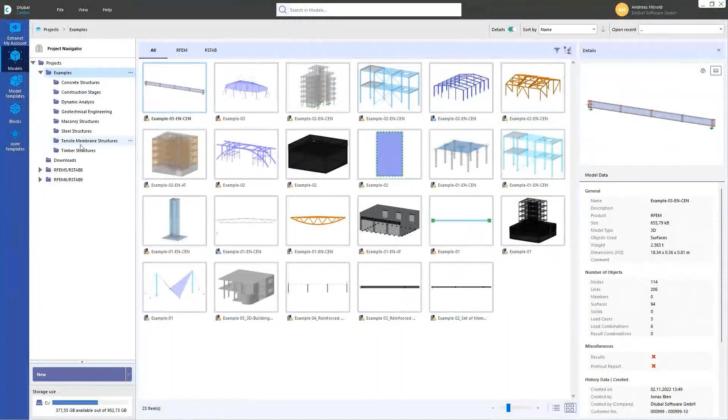You can find this example in the Dlubal Center under examples, then steel structures. I prepared this and also selected the steel design. Let's do a steel design.

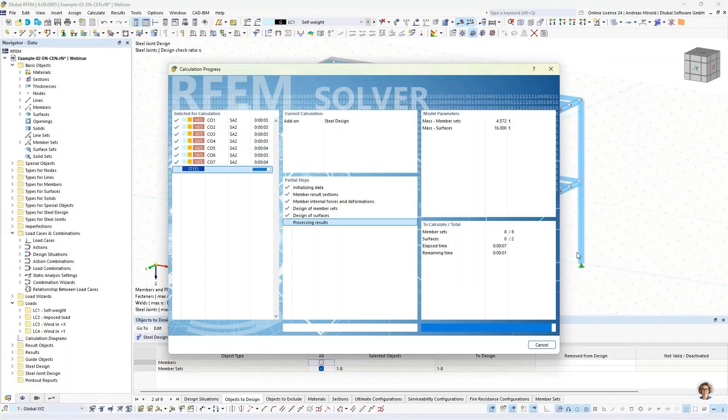I select only the member sets, which are all the columns. Let's calculate all. I have to mention I don't edit imperfections or buckling lengths and so on, so we don't do any stability design here. It's only an example.

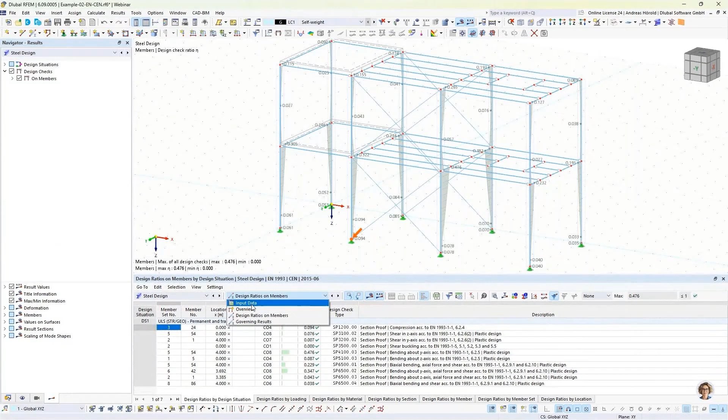So I switch to the wireframe model, and you can see we see all the results for the member sets. When we want to design the members too, I select the members, and then all results are deleted.

Now I'll show you the other way. I calculate the member sets again. If you don't want to delete the existing results, go to the navigator data on the left at the bottom, then right-click on steel design and press settings.

The other way is to go to the table steel design, input data, and press that button. That's a different way. Then you can deselect the option to delete all add-on results when changing input data, and if you uncheck that, the results aren't deleted.

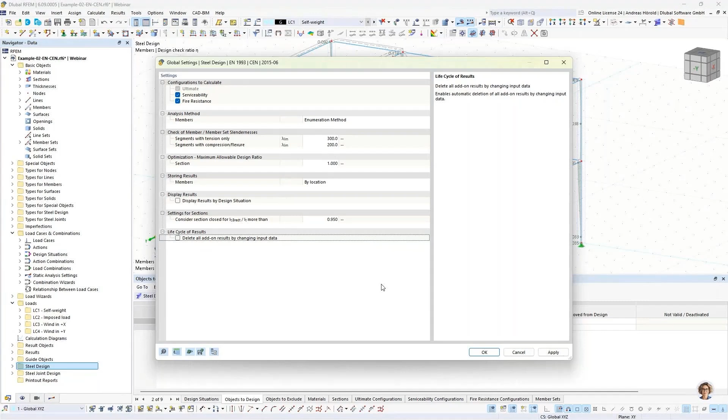So now we select the members too. The results aren't deleted, and I can recalculate all. Now we have results for all.

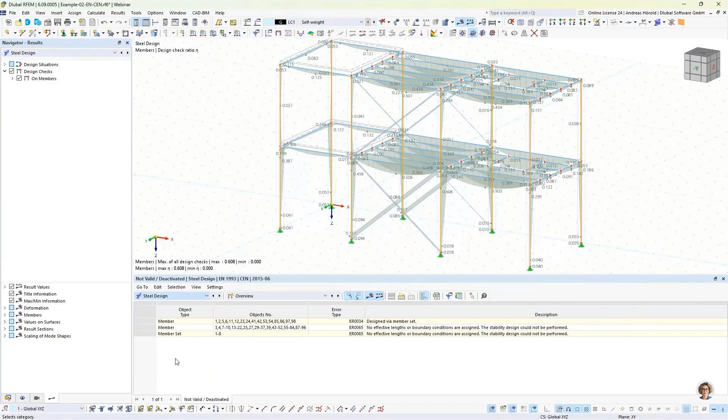It shouldn't be necessary for this simple calculation, but if you have more complex models or more load combinations, for example, and have activated the add-on steel design, this can be useful.

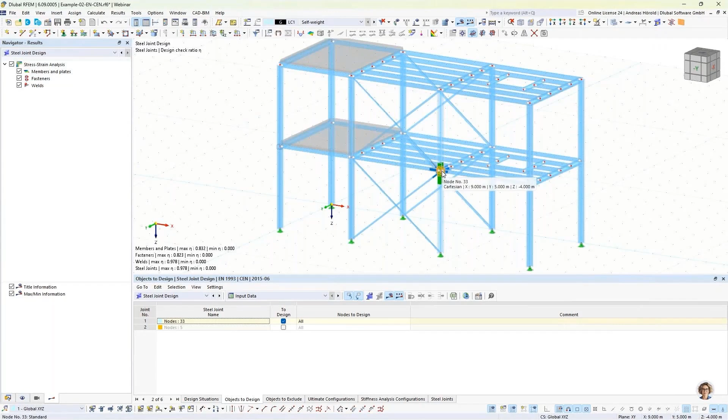In this example, only one of two nodes is designed, only this one. I can show that. This connection, or joint, is already calculated, but not this one.

If I deselect that too, then I can press the button for designing node 5, and the results aren't deleted. It's only an error, not yet calculated, but the results of node 33 aren't deleted.

Okay, then we turn to the next question. I want to edit a multi-print afterwards, how do I do that? I prepared an example for this.

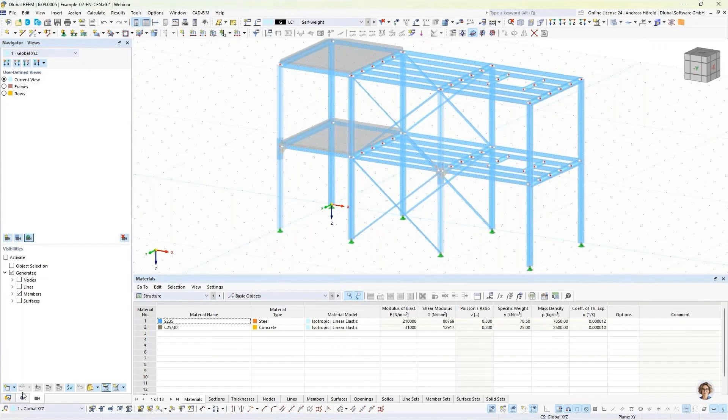First, I don't show the results. As I said, I prepared user-defined views for the frames and rows, and I want to print the internal forces, for example for the rows or the frames. Let me show that — for example, we show the member internal forces for N.

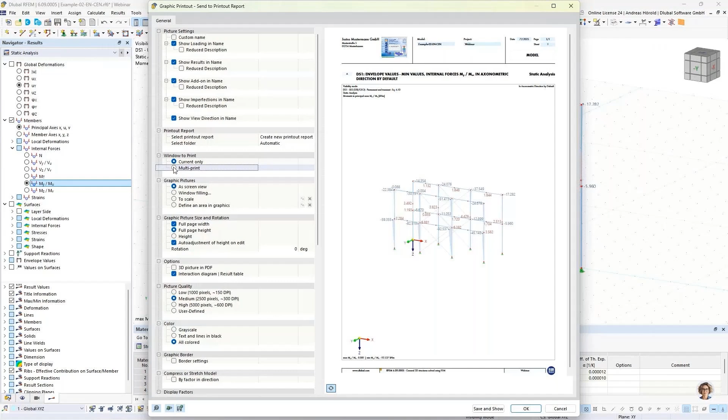We would like to do a multi-print, so let's do that. Print graphics to printout report, then I select multi-print and window filling.

Then we have to select what we want in the multi-print — no views, no loads, but results, for the frames and rows using the user-defined views, then members' internal forces, for example N, VZ, and MY.

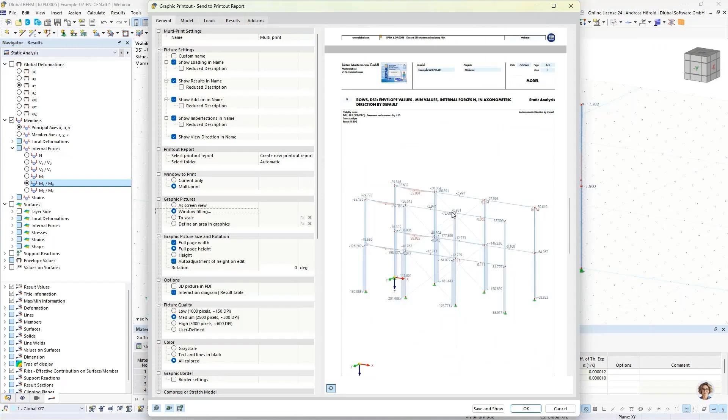I don't print the steel design results and the steel joint design results. Okay.

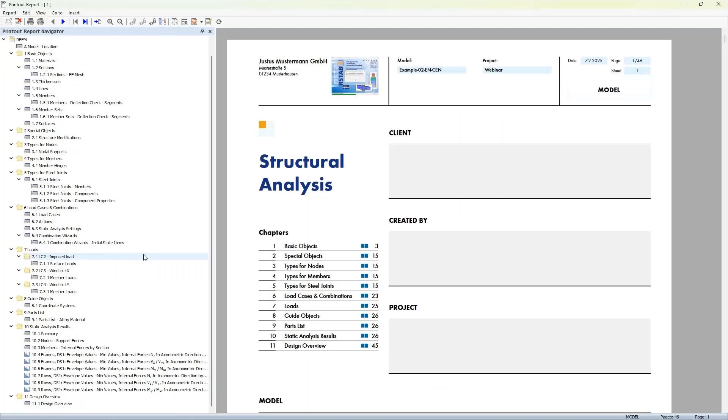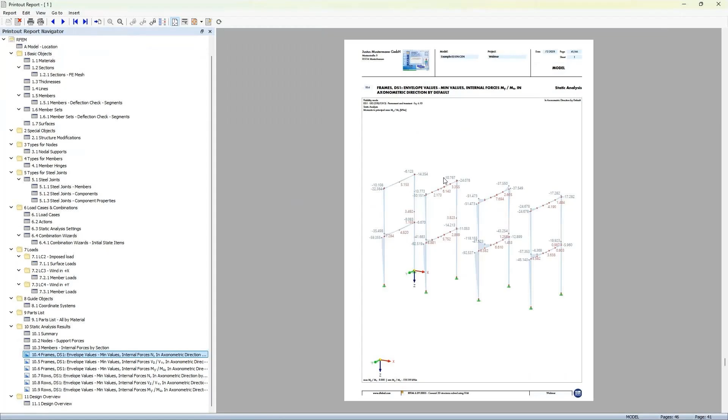So now we can see the different graphics. I can change the view, fit page. So those are the 6 graphics, and we want to edit these multi-print.

So how to do that? That button, edit multi-print, I select it. Okay.

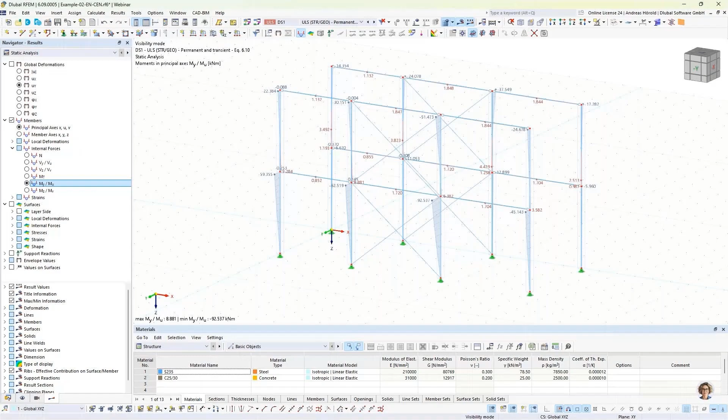So now we can change the settings. For example, results, we want to add the other internal forces. So now we have got 12 images.

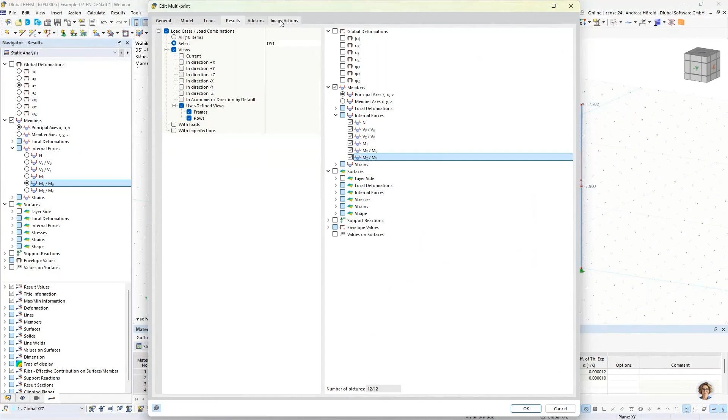And we can go to or turn to image actions. And we can increase the window. We can say update or no action, add for the new graphics, or what you want.

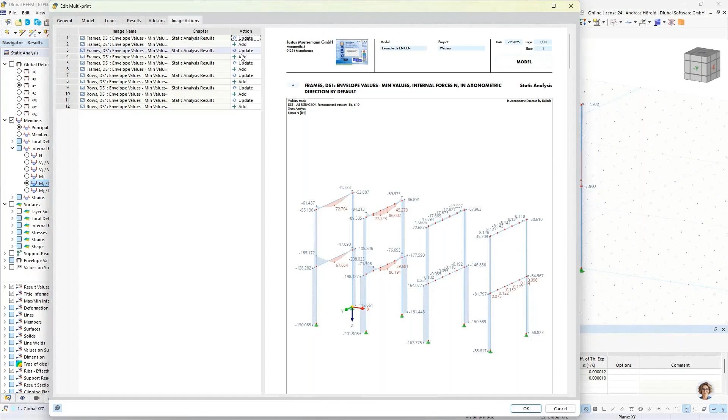You can also change the graphic, for example the color grayscale, then all images should be in gray. Update add, we leave that. Press OK.

So, yeah, the graphics are updated now, all in gray, and we have got all the 12 graphics. Okay, that should be all to that question.

The next question is, why do I get a different section moduli in RSECTION than in SHAPE-THIN? Let's turn back to the PowerPoint.

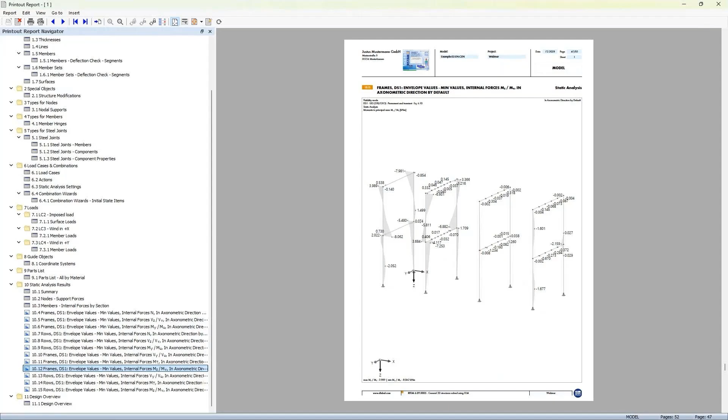Yeah, the reason for that is the determination of the section moduli. That's different in SHAPE-THIN and in RSECTION. For example, in SHAPE-THIN and SHAPE-MASSIVE, the section moduli is determined by that simple formula: the section moduli is equal to the area moment of inertia divided by the edge distances.

And in RSECTION, there's a more complex or more detailed formula. It's more exact, and it's an improvement in RSECTION. And you will get different results.

And what is important, in SHAPE-THIN with the section moduli calculated in this way, it's not possible to directly calculate the maximum and minimum normal stress from the bending moments for asymmetric cross sections. For symmetric cross sections, you will get the same results in both.

And in RSECTION, the section moduli are determined in such a way that they allow for the direct calculation of the extreme normal stresses from the bending moments. And that's the difference. That's a short overview.

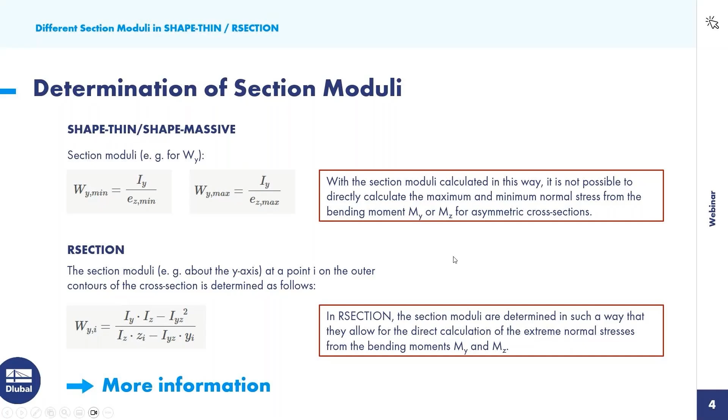We start with the moments of inertia. That's the same: 515.9, and I-z is 94.46 for both. But the section moduli is different.

So, for example, WY max 75 and... where is it? Here, 37.18. The section moduli are different, and the reason is as I described it in the PowerPoint.

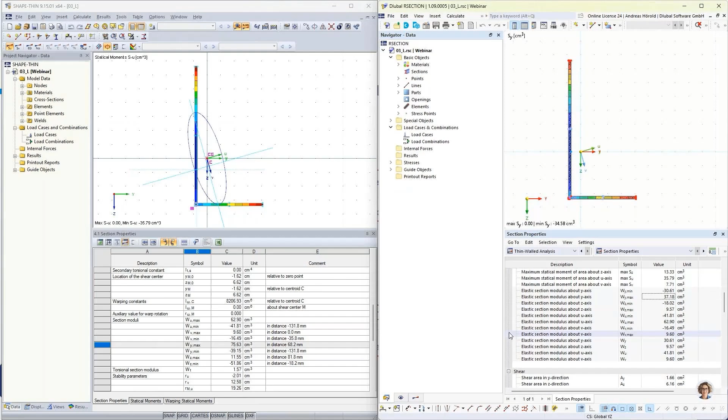So the next question is, can the longitudinal reinforcement of members be determined automatically? I've created a model for you. This is a reinforced concrete building with members building a frame, having 3 frames in a row and 2 stories, and load transfer surfaces which will hand over the imposed load, the snow loads, and the wind loads on our building.

So we already have static analysis results. And what we now want to show is how you can define reinforcements and let them be calculated automatically for you. So we show it in two member representatives.

So number 2 are the outside members and representative number 3 are the inside members. And if you double click on the member representative, you can assign longitudinal reinforcement for all the members behind it.

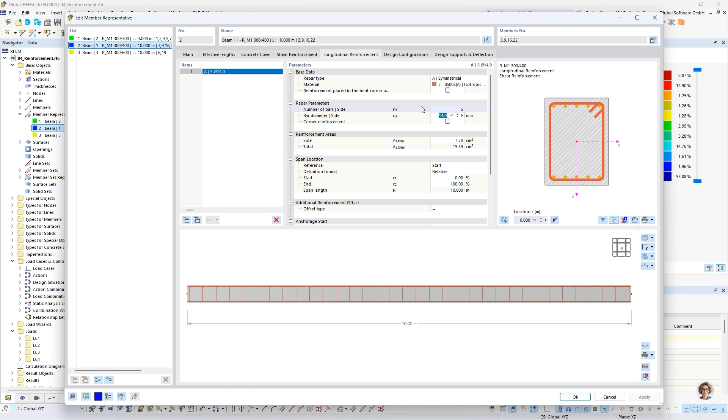So usually you can define the number of bars and the diameter, but the program can also automatically determine this for you. So not both simultaneously, but either the number of bars or the diameter. For representative number 2, we want to automatically design the diameter.

So we want to put inside 5 bars in the range of 10 up to 20 millimeters of size. Whenever it reaches the maximum, it stops, of course, to input more members or a thicker diameter. So you should see in the results that the design is then not fulfilled.

So you can later on adjust, of course, these boundaries in order to let the program fully determine the amount of members. So you see what you can enter in here.

And for representative number 3, we want to adjust the numbers. So we hit auto, and then we can also determine, with a diameter of 20 millimeters in our example, a maximum amount. I know that 4 are not sufficient, so we will try to put in 4 and see what the program will offer us.

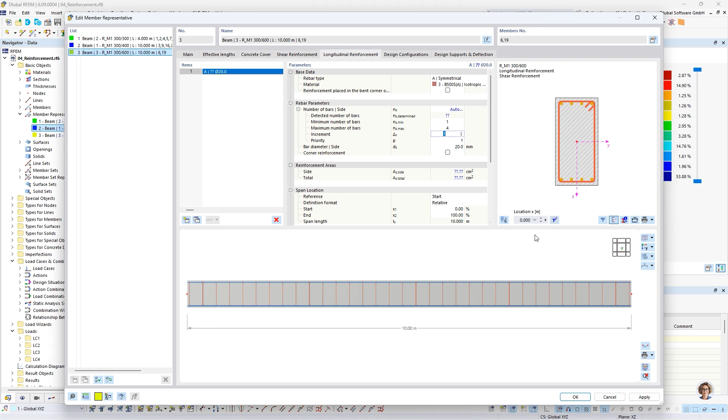We go into the concrete design, where we now only want to get results of both representatives. So now we hit calculate. Due to the fact that we already have static analysis results, it quickly jumps into the concrete design, doing the workflow for you. So it's calculating the amount and diameters depending on what ranges we input.

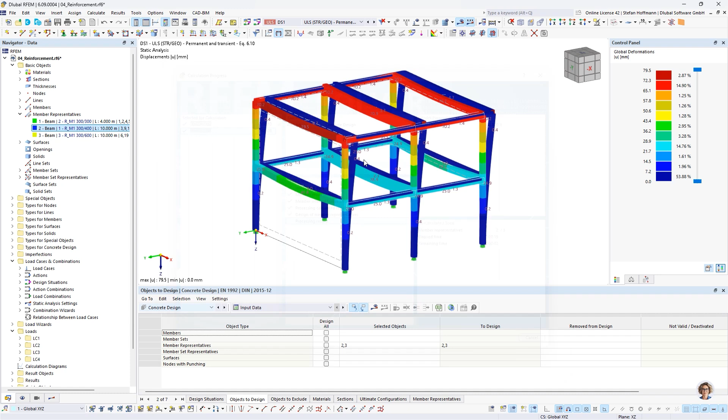Once we receive results, we can see that one check is not fulfilled. This may be an information that there's not sufficient reinforcement put inside. So we can quickly determine the bottom reinforcement for our representatives is like 17 in the middle, and what the program provided us is, if you only check for bottom, 12.57 in the middle. So you may be wondering why it's not enough.

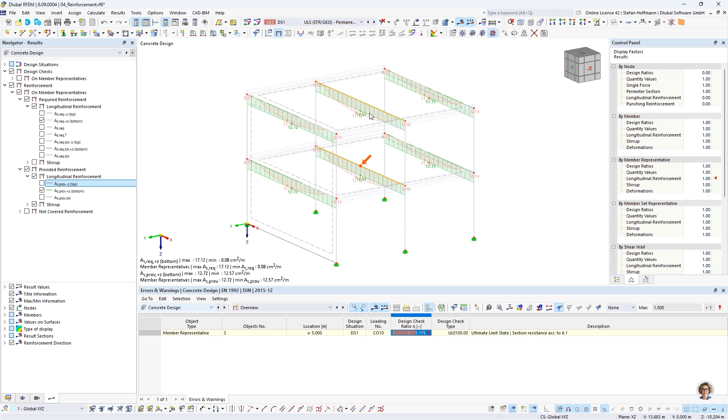You can also check this in the not covered reinforcement if you want to see the gap. So we can now see that there is only a lack in here. And if you remember, going into representative number 3, I told that we want to achieve this result, that we put maximum 4 diameter 20 inside, which will give us 12.57. So this is, of course, not enough.

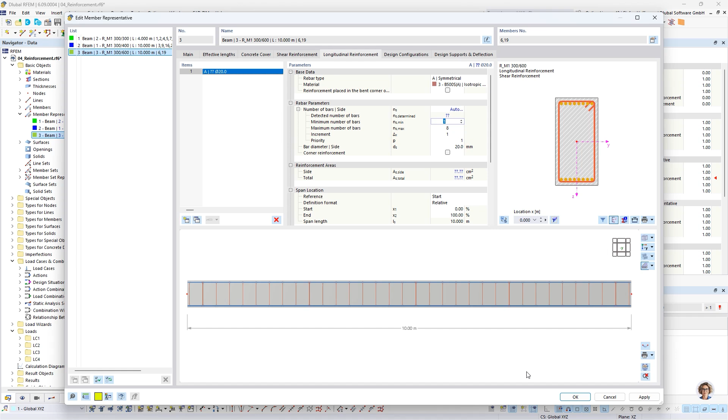So in order to let the program run at full capacity, we now allow a maximum of 8 bars in this member representative. So there is no boundary for the program that it has to stop. It can now determine and fulfill the design process.

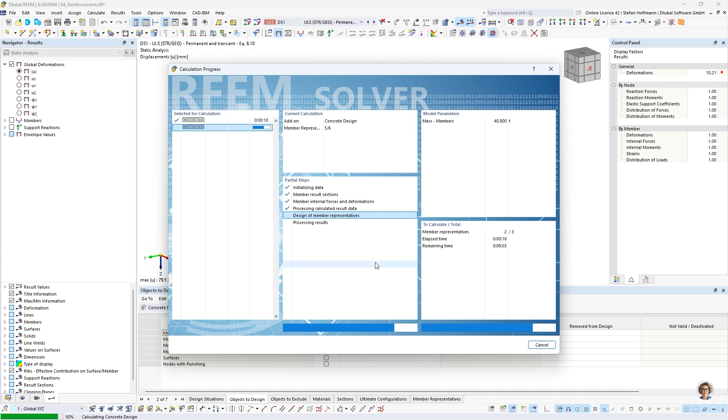So whenever you get results, we see that in the table there is no limit anymore. There is, of course, a maximum, but this is only due to constructions. And if you now compare once again, it does not change. We need 1712, and we provide now 1885 in this area. This means that there is no uncovered reinforcement for our model. And this shows how you can quickly and automatically let the program determine the required reinforcement for your members.

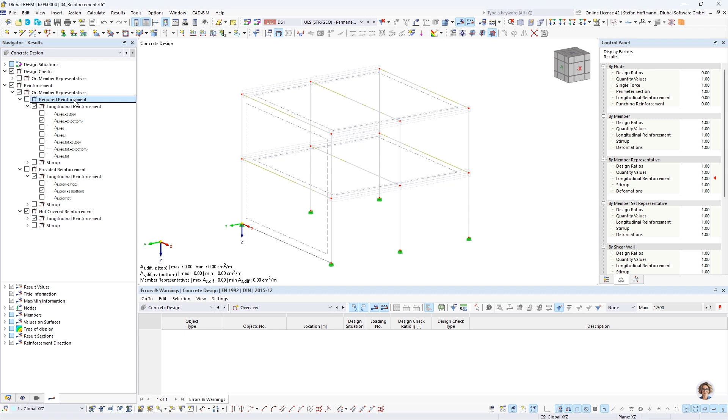We will go to the next model, our block foundation. So the question is, can I design a block foundation in RFEM 6? And yes, it's possible.

So quickly about the model, we have just a single column which is fixed at the bottom with some loads on it. In order to define a block foundation, you have to assign it in a nodal support. You simply hit the check that it's a foundation, and then there's a next topic where you can choose what foundation you would like to use.

It's object oriented, as RFEM 6 offers you to define one object of a block foundation for multiple columns. You just simply need to assign this object, and you do not need to type in multiple inputs just for multiple similar objects.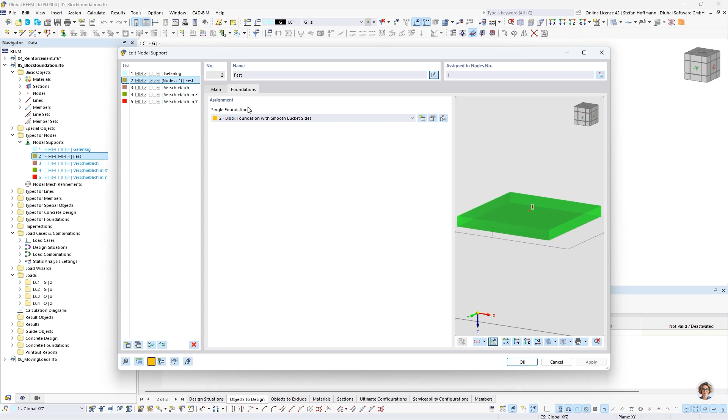So once you define this, it is also shown graphically, and if you double click on it, you directly jump into the single foundation. You can see that there are several types, and we want to take care of the block foundation with smooth bucket sides.

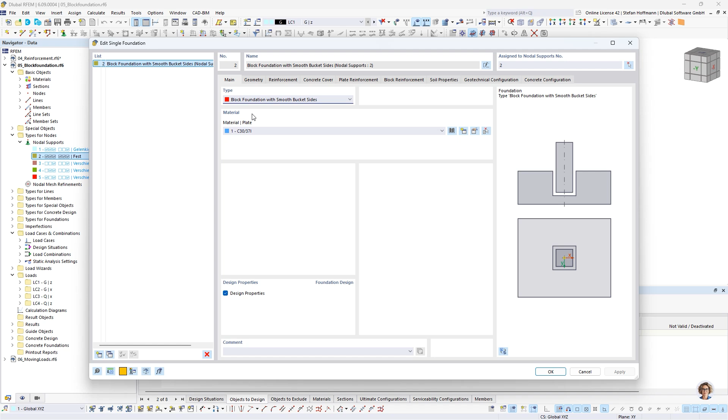First you need to start with a material of the plate, what you define, and then you can step into the geometry, where you can also define by checking the sketch, or you simply switch into the full view, where you can use the view cube in order to rotate your model to see if it fits for your column and your purpose.

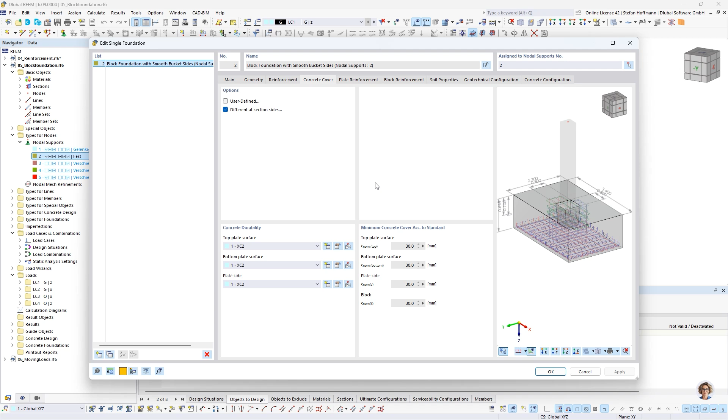Then you step into the next reinforcement definition, where you choose the material and the types. Then you switch into the cover, so you can define different durabilities for different places. The next definition would be the plate reinforcement, so the bottom and top ones, where you can enter the data you would like to.

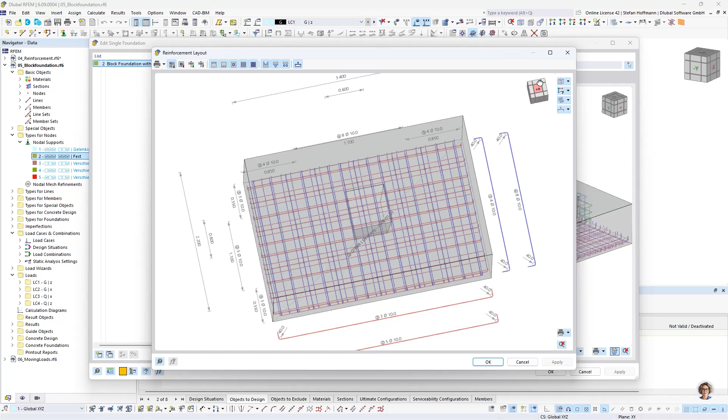You can also directly see the representation of the concrete reinforcement in the graphics. You can also jump with this shortcut into the reinforcement layout, where you also have the view cube, and you are able to switch on and off certain reinforcement types and also print it into the protocol.

The next one is the block reinforcement. So for the bucket sides, you can also define stirrups, which is most likely necessary depending on if you have a lot of horizontal loads.

The next one would be soil properties. So we also would like to do a geotechnical analysis in our model. You can define user-defined soil parameters, or most likely, with the geotechnical add-on, a soil massif, in order to gain all the soil properties we need.

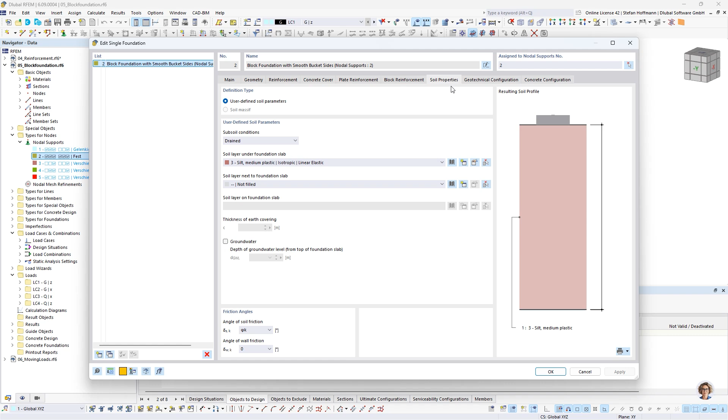The last two steps would be to check or assign geotechnical design configurations, where you can choose what you would like to inspect. Either it's necessary to do all, or you can just choose to do some designs only. And last but not least, the concrete configuration, where you are able to adjust the current set parameters.

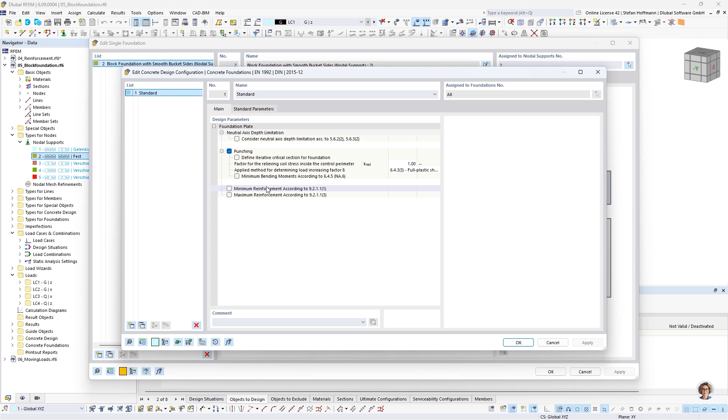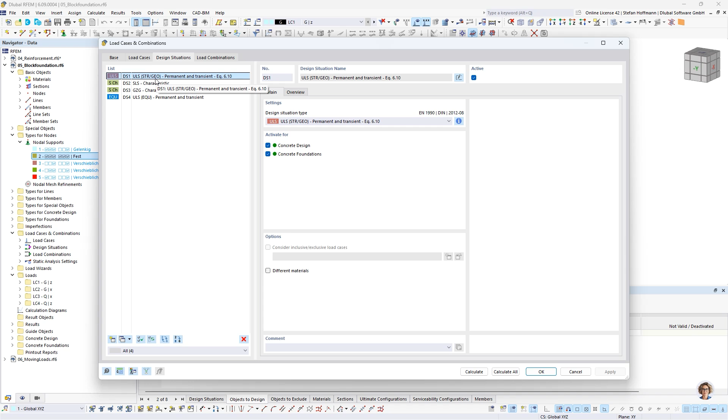So we defined all the properties. We'll just step quickly once again into the loads. We defined multiple design situations: the normal ultimate limit design with structural and geotechnical collapse, the SLS situations, and also a ULS equilibrium permanent and transient design situation, which we will only take care of in our concrete foundations.

So jumping into the concrete foundations, you see that we have assigned the design situation types, and if we hit calculate, it will run first of all the static analysis, because we do not have results yet in this file. It does not take long - you can see 6 cores are used on my computer, 3 seconds. And then we will directly jump into the results.

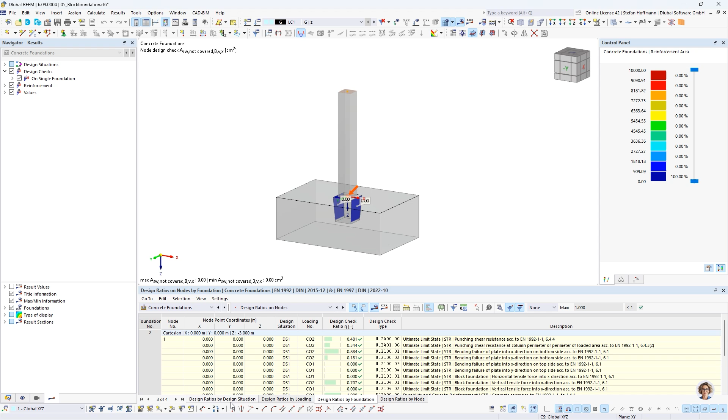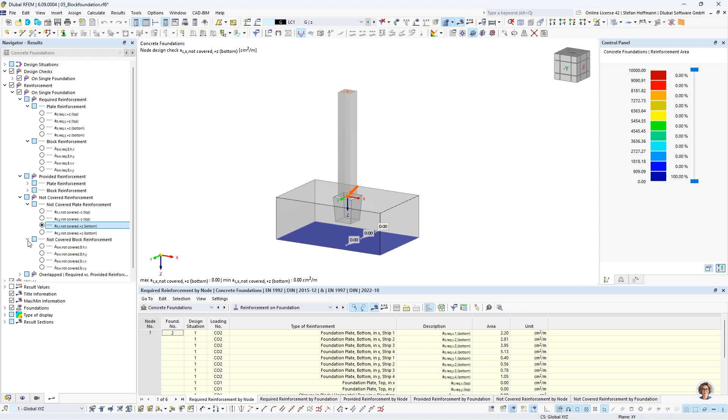So you have, as you are maybe used to, also table results, where you can switch between representation of different information. You can also use the navigator to check for all the required or provided reinforcement, split as shown in the first part, also for the plate, bottom and top, and also for the block reinforcement, which might be required to fulfill the force distribution into the foundation. And of course, you can also see the not covered reinforcement by checking the values. As you can see, we are lacking some reinforcement in the bucket sides.

So we are coming to my last example. And the question is, how can I create moving loads in RFEM6?

In this example, I use the model from our knowledge base article 1908. We have a load we would like to define: 2 single loads, 1.5 meter spacing, vertically and horizontally in both directions. And we have an axle load of 240 kilonewton per square meter with a size given here. It should go across the bridge.

In order to have the loadings defined, we first of all need to have a line, which then needs to be a line set. The line set will be used to define the load direction. And it's no extra add-on you need - it's already included in the main program.

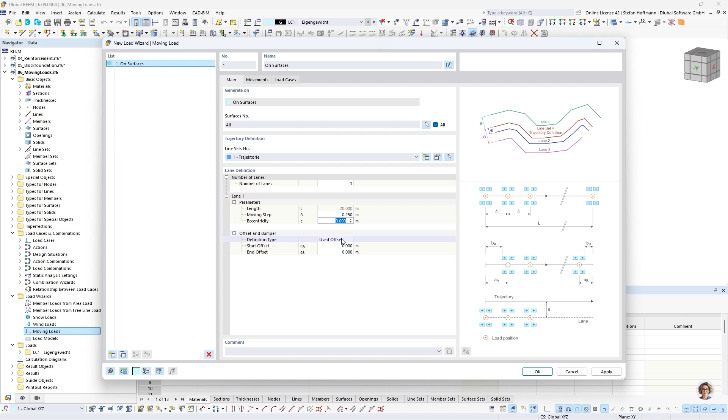So it's a load wizard where you define a new load wizard with moving loads. You go from top to bottom, left to right, and you have to define what surfaces you would like to use. In our example, we can hit all, because only our street is used with surfaces. Since we only have one line set, it's already assigned over here. We want to have the moving step at 1/4 meter, and the rest we can use as it is given, only one lane.

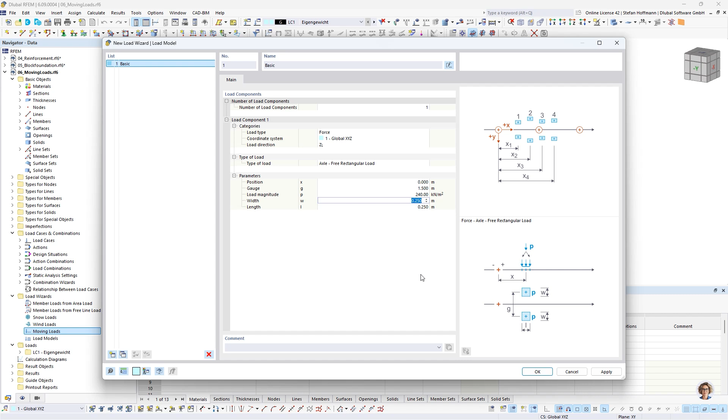The next thing would be that we have to assign our lane definition with our load model. You can click here, since we did not yet define a load model. We want to use one load component with a force, load direction ZL. We want to use the axle free rectangular load, and we will start at 0, have a gauge of 1.5, 240 as value, and then the width and the length at 1/4 meter. If we hit OK, the lane and the load model are together, and we only need to hit OK.

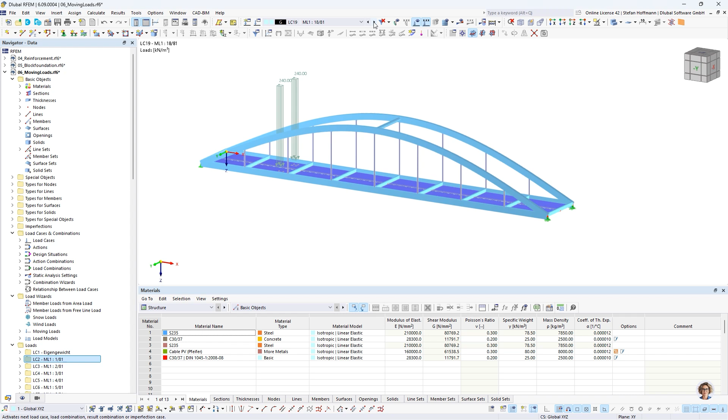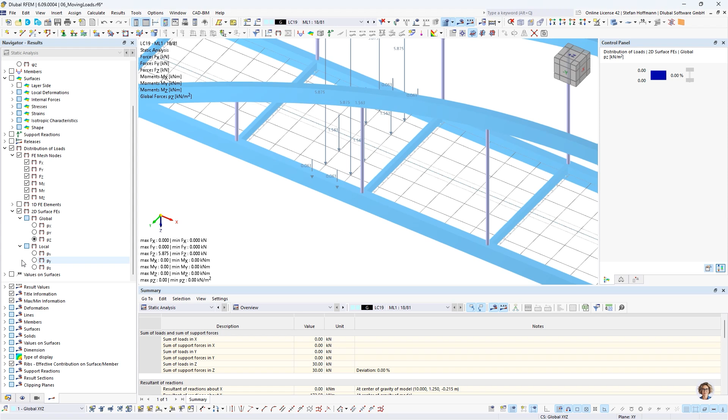So you can see that loads will be created, 81 load steps. And you can then see how the load is moving over your bridge by checking these steps. You can also run a calculation for one certain load case, or use it in a result combination to get an overview of your results. Another good step you could use is the distribution of loads, where you can check how the loads will be transferred, most likely as PZ values, or sometimes also as split nodal loads, depending on how you use the definition.

All right, so I come to an end. Thanks for your attendance, and I hand over back to Andreas.